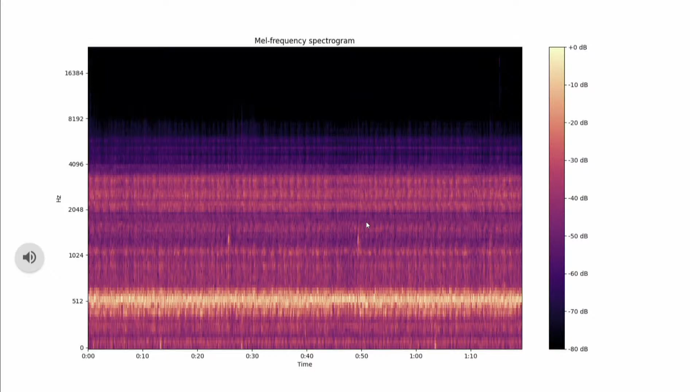Now, why am I interested in this? Well, first of all, my professional life has been surrounded by sounds of various kinds. I've been playing sounds as a musician, analyzing sounds, and particularly interested in looking at what we call the action-perception loop of people - how we, body and mind, interact in our activities. I'm also interested in the relationships between people and how they engage in musical collaborations, like dance and other things together. More recently, I've become very interested in how we also interact with the environment around us, including people, but also spaces like the one we're in right now.

So this has kind of been an inspiration here. You can say that, as a timeline, I spent the first part of my career studying more large-scale body motion and making instruments, and this is summarized in a book called Sound Actions that came out a couple of years ago. It's available open access if you're interested in having a read.

After doing this large-scale motion work for some time, I got interested in standstill and not moving, and what happens there, and how sound and music influences that. I'm currently writing a book called Still Standing about all of these experiences.

As part of that, I got interested in spaces of various kinds. In 2023, I decided to stand still every single day to work on this book manuscript - standing still for 10 minutes every day, measuring myself with a mobile phone and also recording the spaces with a GoPro camera and an ambisonics microphone.

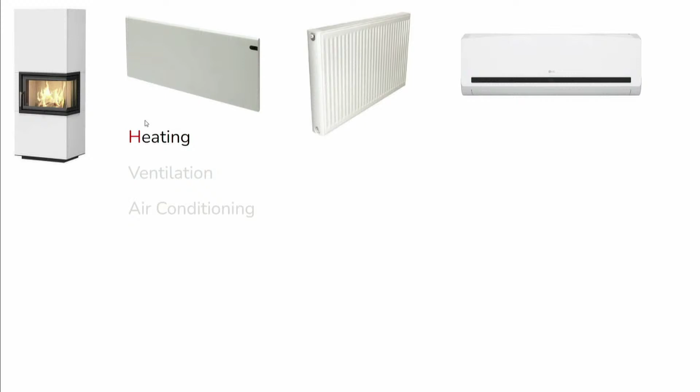So in most of our systems, at least as far as I understand, the heating is not really part of the system itself. That's a separate thing we're doing.

But the ventilation is there, and air conditioning, given this country, we don't really have that much of, just because it's not really that warm in general. So most often we have ventilation systems of various kinds that are more for blowing in air.

But then, what's the role of these then? Well, that's what I want to figure out, and that's why I have you here today as a group of people to help me figure these things out.

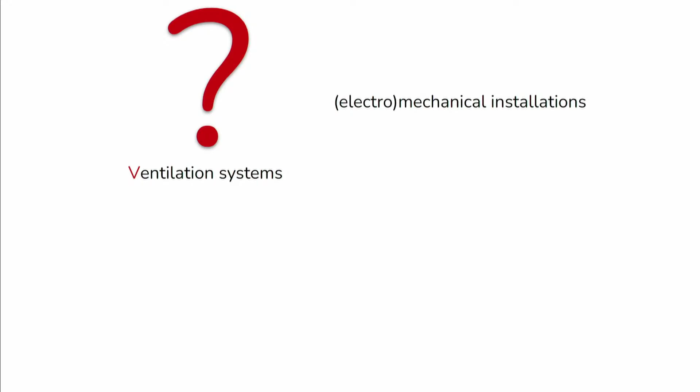Because first of all, ventilation systems are electromechanical or mechanical installations that we have in our buildings. They are important for giving us oxygen of various kinds. It's almost more metaphorical, but it's an interesting way of connecting indoor to outdoor, or outdoor to indoor.

For example, at home I have a passive system, it's just a channel, but I can hear the birds through that channel, so it's an interesting kind of opening to the world in a way, from inside.

You could also think about it more metaphorically about connecting people. I'm not exactly sure how the ventilation tubes run, but at least in my old office down in the Department of Musicology, it was somehow connected to one of the rehearsal rooms in the basement of the building where we had drummers playing drums.

And then that went straight into my office, four floors above. So that's also a way of connecting people.

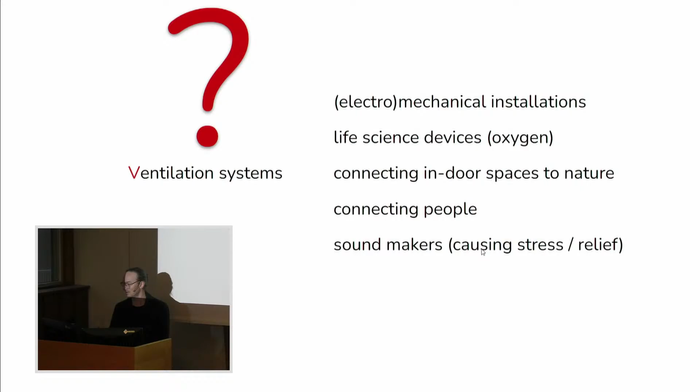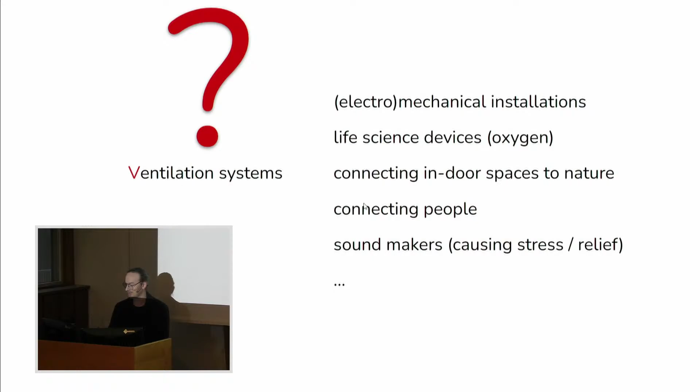And then, of course, you can think of it as causing stress or relief depending on the quality of these things, and possibly many more. So these are some of the interesting things I find about ventilation systems, and it's kind of inspired this workshop we have here today, to try to figure out what is this and what can we do with it.

Now, many people have asked me what type of method I use and we use when we explore these things, and I'll briefly explain that, to frame this workshop as well.

I like to think that we work both on the nature and the culture side, trying to figure out what's happening here, and I'm not thinking about this as two categories but more as a continuum. And I like another continuum as well between art and science, where we can think about different types of artistic and scientific practices and how they can coexist and work together.

So on the scientific side, we write publications, and on the artistic side, we create artworks. But then, of course, there are other things where we can use scientific methods to create art and use artistic methods to create science.

But also then different types of things in between, where we really see quite a lot of overlap. And that has highly inspired the work we're doing in general, but also this particular workshop.

And that's also why in this program you see a combination of more scientific and more artistic things, because I really want to bring you together and talk, so that we can talk to each other and try to see what's really going on here.

So with that, I think I'll stop the introduction and leave the floor to the first speaker, Anders Homb from SINTEF, talking about, well, just giving an introduction to ventilation systems, what it is.

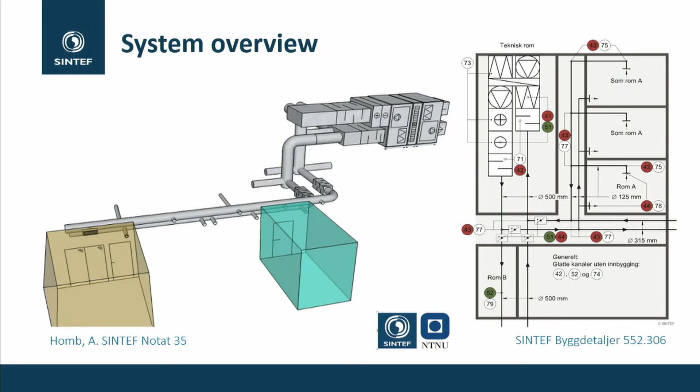Noise sources, important, of course. We have these mechanical units, fan and blowers. But another important contributor is the airflow generated noise. If airflow goes through a duct system, you get some airflow generated noise from silencers and pipes, bends and branches, dampers, and the terminal units. And of course, flow constrictions are very important. It may give a very sharp increase of the sound power level, orifices and perforates.

The third part is about sound radiation directly from the aggregate. I don't talk about that because that's normally far away from the rooms. Sometimes the duct wall can be a limitation.

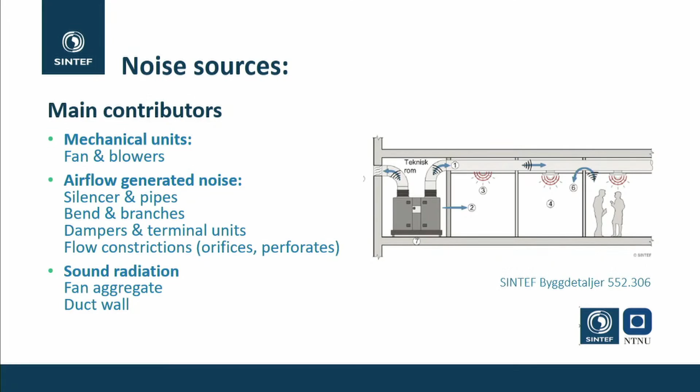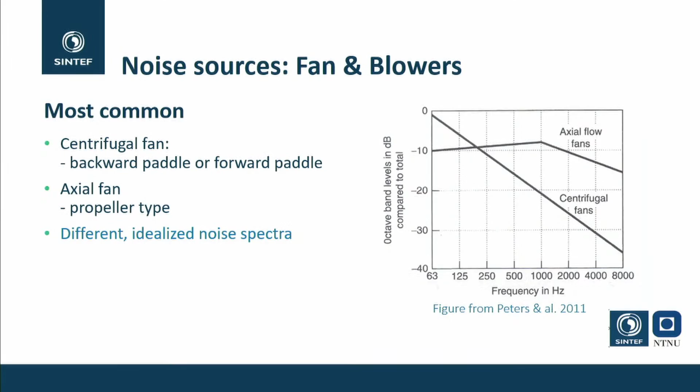For prediction, we need to have a reliable level of the sound power from the fan. We really need data from the producers, the specific fan power level. It needs to be adjusted depending on the volume flow of air, pressure loss, and other parts, but we still need this specific power level.

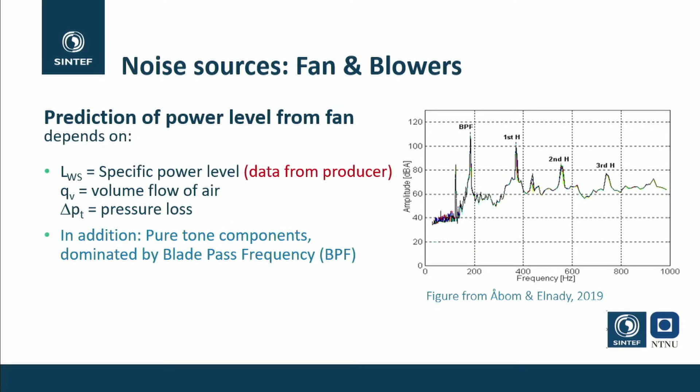So we have pure tone components, more or less. Then there's the airflow-generated noise. Prediction methods exist for this.

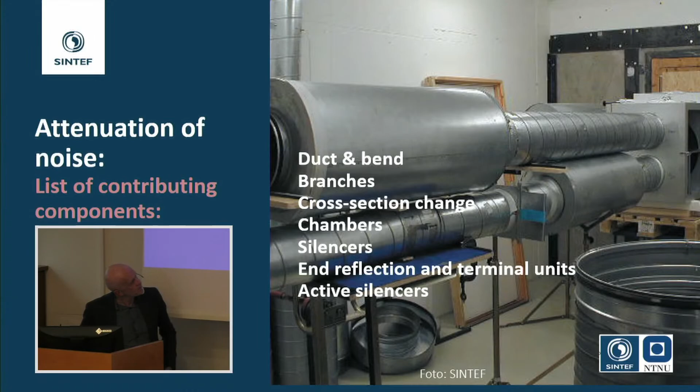Yeah, sound attenuation—no equations for me, just talk about it. Duct and bend: it depends on the type of duct profile, whether it's circular or rectangular cross-section.

The circular shape is dominant and most preferable because it is much stiffer, so it doesn't radiate the same sound—you need to take care of sound radiating directly from the duct. But when you need large cross-sections, rectangular ducts are often used to save space, since that format works better than circular. I think the circular one is also much cheaper to install and produce.

You will find tabulated numbers for what the attenuation level will be, with and without absorbing materials inside the duct. Next, the branches.

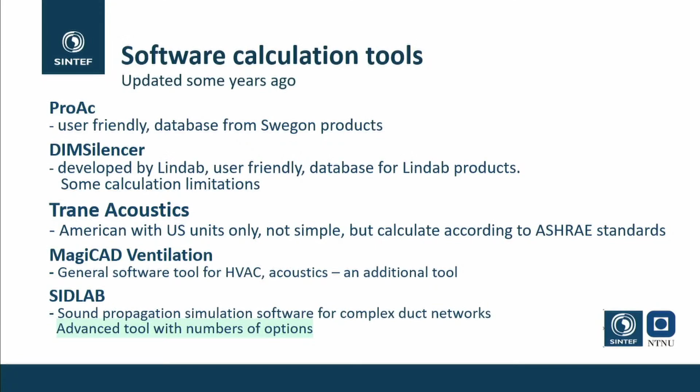But we also have a DIN standard similar to that. This SIDLab though is mainly developed for industry - car exhaust systems with much higher speed of air and maybe also higher temperature. So I haven't seen it used by engineers in buildings so far, at least not in Norway.

Summary on predictions: there are significant uncertainties in the total picture. At least plus minus 3 dB is to be expected compared to what you can measure afterwards. It depends both on the uncertainties in noise generation and attenuation components, and also on the measurement methods - because you need input data on a lot of products, how precisely they're measured, how that compares to the standards, and how the standard compares to what you have in your system. So you can't expect too high precision on these predictions.

But to get a bit closer to what you should get in the real building, you should still try to do some predictions, especially because you need to meet energy optimization requirements - at least in Norway, I don't know if it's the same in other countries. So results are often debated when comparing with measurements in buildings.

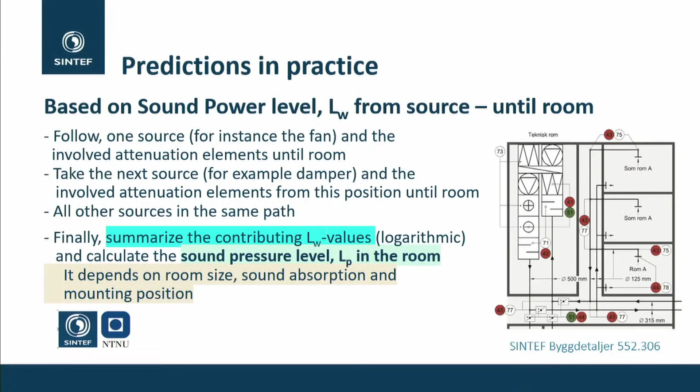So in building acoustics we normally measure in 1/3 octave band. The requirement is often in octave band. But if we need to study and get rid of frequency components, pure tones and so on, we need narrow band information.

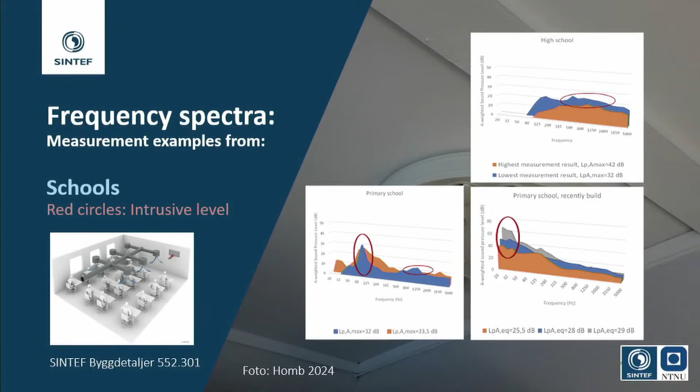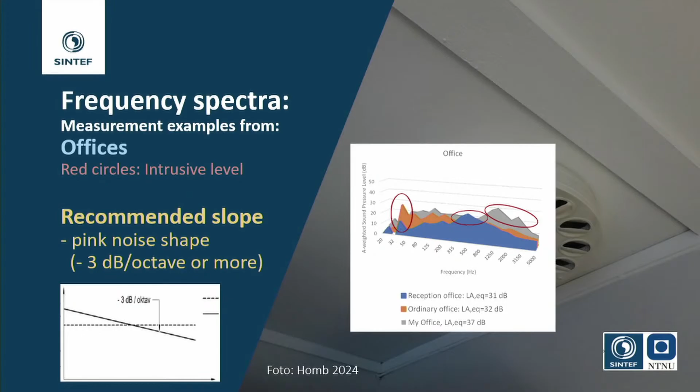Yes, then to the specific fan power.

If you actually need an energy efficient system, it requires low speed of air and as small airflow volume as possible. Then, of course, with a low speed, you reduce the airflow generated noise. That's pretty nice. But it means you need very often very large duct cross-section to have this lower speed, because you need to divide it on more space. And the negative part is you have to increase very often the story height. And story height costs money.

You can imagine that instead of having a huge circular duct, you can divide it into two or three smaller ones, and you save space. But then the cost of the installation will increase very much. So I haven't actually seen it, but it's an opportunity. The second part is you need low pressure drop in the system for saving energy from the fan. You can reduce the pressure drop by minimizing the use of dampers, silencers and in-duct absorbers, because they are important contributors to this increased pressure drop. But if you remove too many silencers or attenuating components, you get increased noise. So we have really a conflicting issue between SFP, space, and partly noise. SFP and noise directly are more or less in parallel, but with respect to space and noise, and space and SFP, it's conflicting.

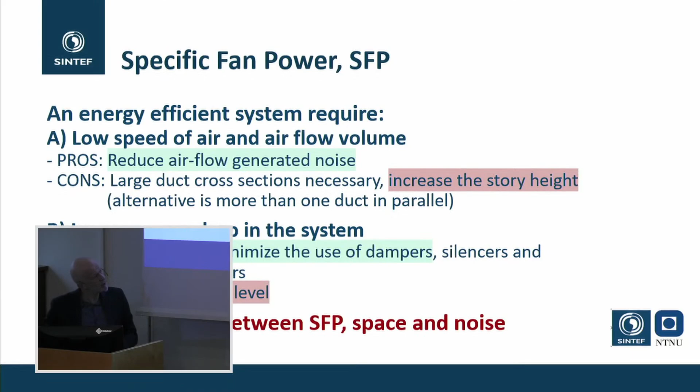We have seen, for instance, numbers of schools where you need duct dimensions like this one, and the story height becomes very, very costly to increase that space.

Alternative concepts: instead of having ducts into the terminal units, the volume above this ceiling is a big chamber, and you have only slits in the ceiling absorber to the inlet of the air. Maybe you can make more pretty solutions. This is actually from a recently built research building in Trondheim, called ZEB Lab, where we have experimented with different types of installing HVAC systems, and compared with the indoor climate and the responses from the people who have their office there. We will not focus on noise, but it's very interesting, and it's an alternative.

And then you also, of course, save duct length, you have much less meters of ducts because you use this chamber instead in this bigger room. It's not relevant for a small room itself, actually, more for bigger areas.

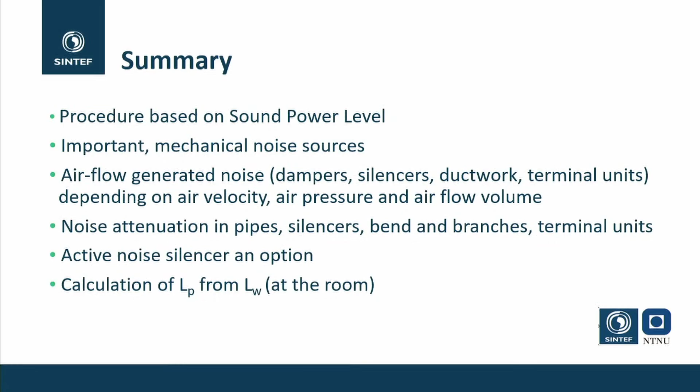So, already at the summary: I introduced this important parameter, the sound power level, which is the main thing to focus on inside the system. And I've told you about important noise sources, mechanical sources. And this very essential part is airflow generated noise from different components. The same components may generate noise, but they may also attenuate noise. Active noise silencer is an option, and when you then come to the room, you need to calculate the sound pressure level from the power level. Finally, you have actually a conflicting interest between the SFP, the space, and noise.

Frequency spectra: at low frequencies, noise from mechanical components dominates the content of the noise. At medium and high frequencies, it's mainly because of airflow generated noise. There may be some harmonics depending on the RPM of the fan, but mainly it's airflow generated. So I think you should remember it's very important to avoid pure tone components. They are really disturbing, or high sound levels in narrow bands. Fluctuating sound pressure is also very intrusive. If you happen on something like this, you can listen and recognize it very well. And the same if the pitch is slow or fast changing of the frequency components - it's also very disturbing.

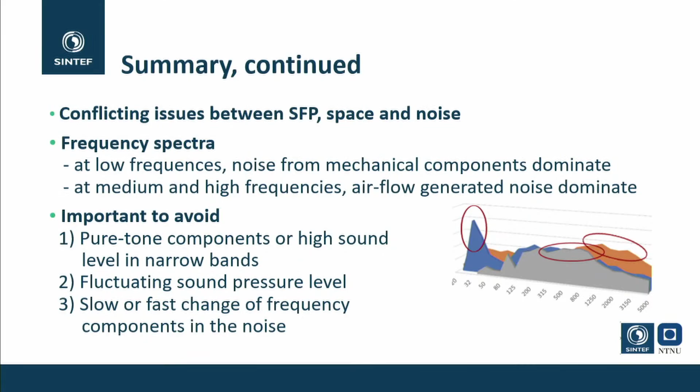Now we're going to something totally different again. I'm very happy to have Stig-Ronny Fredrikstuen from Glava here today, a well-known Norwegian company making insulation. I'm very much looking forward to hearing you talk about the material side of things. So over to you.

Thank you so much for inviting me here. It's very exciting, and as Alexander says, it's a bit different for us. I'm looking forward to seeing your reactions, and to tell you how we perceive these issues with HVAC systems.

For us, the sounds coming from ventilation systems, we perceive all this as noise, and we don't want this sound. So what we help with is to remove it. We will not work to adapt things so that you'll enjoy the sounds. For us, it's noise, so what we do is try to remove it.

I've made this presentation together with my close friend and colleague Halvor Berg, who is a concept developer for Glava. So you might see that he is also very interested in sounds, both in buildings and from ventilation systems.

First of all, Glava is part of Saint-Gobain, a very large international company making building materials. Glava has been producing insulation products in Norway since 1935, and today we are approximately 350 employees. Glass wool insulation products made from recycled glass is our core business, but we help with many needs for insulation products for buildings besides just glass wool insulation.

I've been in the construction business since 1998, so it's beginning to be a while. I've been working with technical insulation, and only technical insulation, in Glava since 2016 — actually it was 8 years yesterday, so it's been a while. I'm part of a team of 8 dedicated colleagues who only work with technical insulation.

For you, I'm also a hobby musician. I play guitar and I sing. I'm the world's most basic guitar player, and if you let me jam with you in the key of E, I will play the hell out of the pentatonic scale.

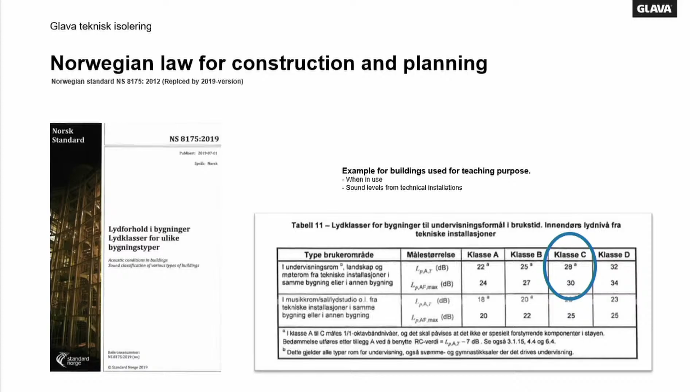In buildings for teaching purposes, we can see that there are two levels of decibels. The top level here, 28 decibels, is the maximum allowed average, and the 30 decibels is the maximum peak, as I understand this. So I will use this 28 decibels as an example through this presentation.

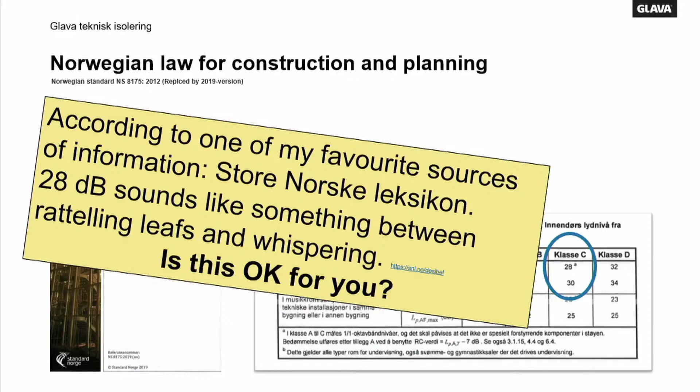According to one of my favorite sources, Store Norske Leksikon encyclopedia, 28 decibels sounds like something between rattling leaves and whispering. And our question is: is this okay for you? Are you happy with a ventilation system that sounds like something between rattling leaves and whispering?

Because when you are doing a project, if you are the building owner or you represent the building owner, if you don't tell the people who are building or making the contract with you what you want, they will, of course, make you the system that meets the minimum requirements. If you don't tell them that you want anything else than rattling leaves and whispering in your ventilation system, that's what you get. And of course, if you haven't specified anything else, you have to be happy with what you bought.

So I've made this to try to explain. Sometimes you use a main contractor who will be responsible for meeting your requirements, and the main contractor is then responsible for the subcontractors, gathering all this for you as a package, and you pay only the main contractor. So in this case, you have to tell the main contractor if you want something else than the rattling leaves and whispering - that I want something better, or if I'm concerned about sound, please follow maybe column B or A in the same standard. I think it's a good idea to use a standard, because then you can measure the performance later, and there's a system for that.

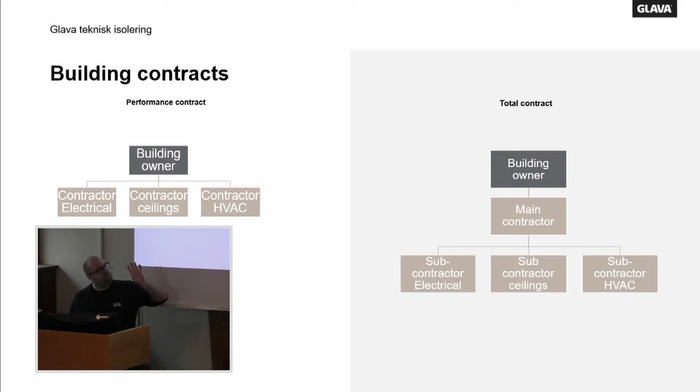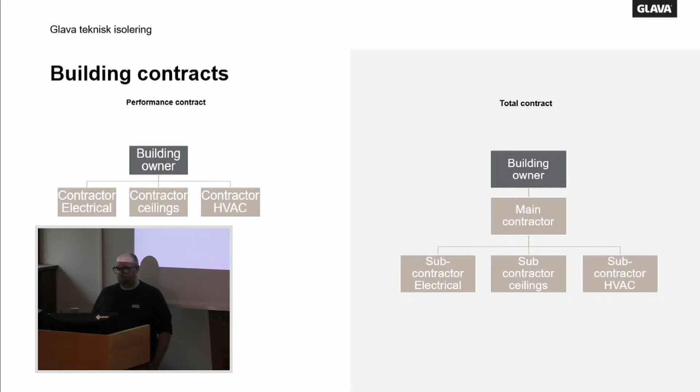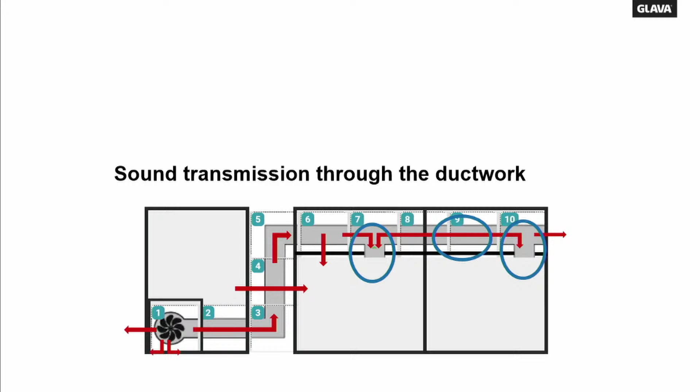So I will try to break this down and talk a bit about some of the different issues we see here. The first is transmission through the ductwork. This is the sound inside the duct. It can be made by flowing air - the higher the speed, the more volume or decibels you will have. And a way to stop this sound is by using silencers.

We provide a board made of glass wool with a glass wool tissue that air can flow across, and this board will absorb sound in the same way as a sound absorber on walls. This silencer works the same way: inside these duct pieces, these boxes, there is absorbing material where the air passes through, and it will absorb the sound.

For higher frequencies, we can use smaller silencers, which are placed out in the building. The larger ones, which have more or thicker insulation, are able to absorb lower frequencies and will typically be placed closer to the machine or the fans. The thicker the insulation, the lower the frequencies you're able to absorb.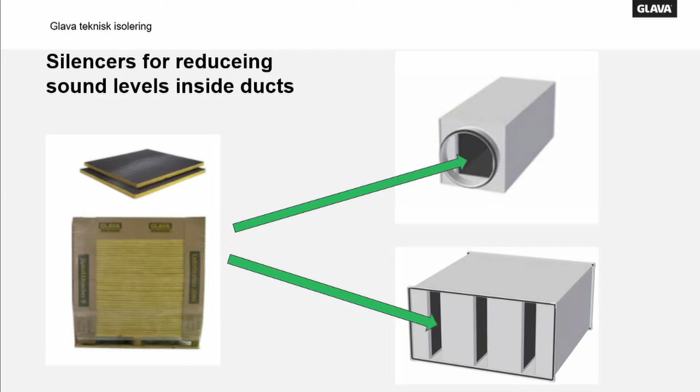It works like this: the sound waves flow through the duct, and when they hit the absorbing material, they are absorbed, and the volume coming out on the other end will be less than when it came in.

We had a filmmaker here earlier. I've made a film for myself, it's very high quality, and I hope we will get the plot here. It's quite advanced, we've been using two phones, one for filming and one for sound. This is my hand, and I will put my phone inside this and just hear how effective these silencers are, because there are many manufacturers and such, but just listen. I think you will understand this movie.

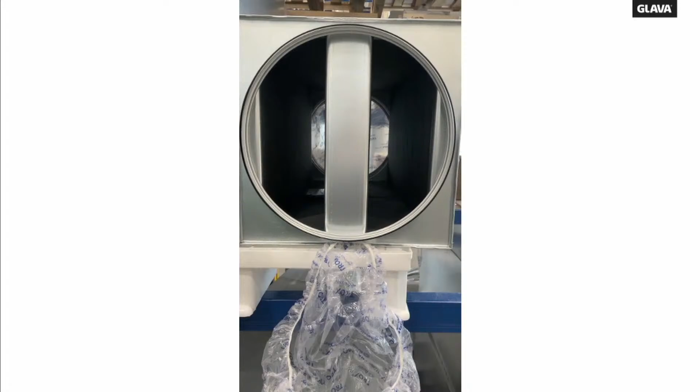So, how did I do, filmmaker? Good soundtrack.

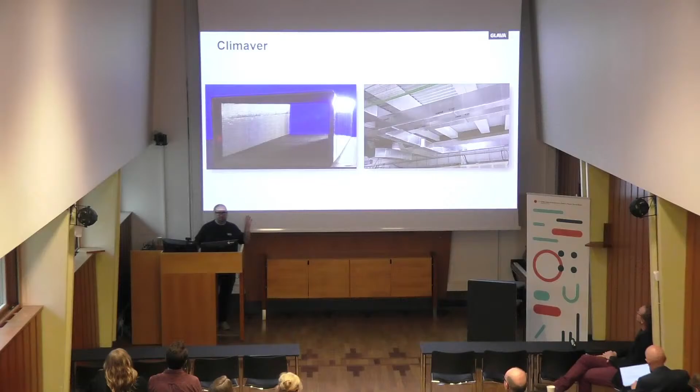This is a bit of a commercial, but in Glava we have a system called Climaver. I have a small piece of this duct here, but we are able to build the entire duct system with recycled glass wool boards that will absorb sound along the entire length of the duct. Every piece of the building will be able to absorb sound, and we can calculate the specific fan power and such, and the dimensions of the duct. As you can imagine, this will absorb a lot of sound, and we will also be able to avoid resonance from the material, because it's not metallic, so it won't vibrate. I will come back to that.

If we've dealt with the sound inside the duct, maybe we want to stop sound too. Absorbing is one thing, stopping is another. So the sound coming through the walls or through ceilings follows a different principle.

To stop the sound, the principle is that we would like to use gypsum. It's a heavy, hard, dead material that stops the sound from penetrating. We also want a gap between the two sides of the wall to avoid any resonance going from one side to another, and we want to fill any gap with mineral wool to avoid cavity resonance. So this is the principle.

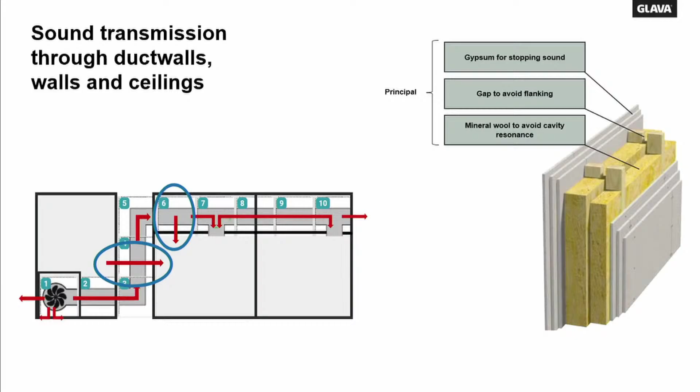Of course, you can insulate the duct on the outside, it will help to some extent. You can use advanced ceilings that will also help to stop the sound. But the principle is that we want to stop the sound, avoid vibrations, and avoid resonance. There are many ways to attack this, because there are so many different places where ducts are placed. But this is the principle for stopping sound.

This is a small section of this presentation, but I think sometimes when we specify and engineer the systems, this can also be a problem: having several noise sources will increase the noise levels. Doubling the noise sources will increase the noise, the dB levels, by 3 decibels. So if you meet the requirements with 28 decibels, you're good to go.

But maybe you or someone else also add more technical equipment with the same decibel levels. They also meet the requirements from the law, but the result is not 28 anymore, it's in this case 31. This can maybe be ventilation.

Maybe the other one is plumbing, maybe it's more ventilation, different systems. It can be something to be aware of for those calculating and making the systems, that more sources will increase the levels, even though one system will uphold the law or meet the requirements. It can sometimes be hard to find the responsible one for the customer not being happy, because what the customer experiences is that the noise level is too high, but it's not the ventilation's fault and it's not the plumbing's fault. It's just an unhappy customer. I don't know how big this problem is, but it's still a truth.

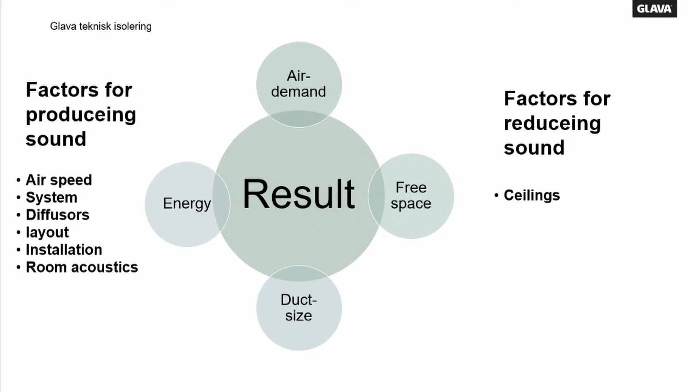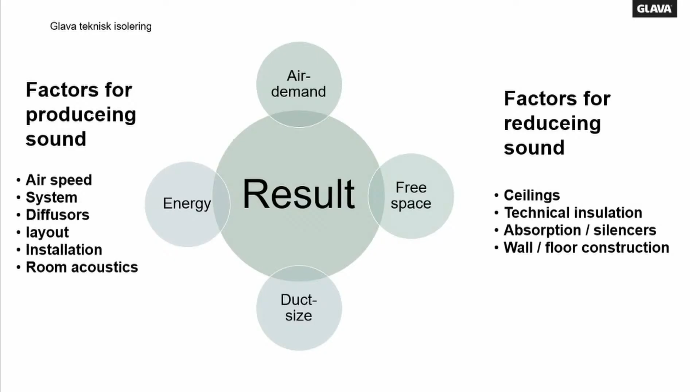We can reduce some of the perceived sound with ceilings, sound absorbing ceilings, and also stop the sound from the ducts penetrating the ceiling. We can use technical insulation around the ducts to prevent sound from leaking, and there are different materials we can use there, but we can insulate the ducts on the outside. We can use silencers and absorb the sound inside the ducts and also in the rooms with the room acoustics. And the construction of the building - is it resonating a lot, or is it built in a way that maybe stops some resonance? Are the sound stopping walls good or bad? It will also affect how the noise travels through the buildings.

So that was my presentation. Thank you so much for listening, and I hope you learned something.

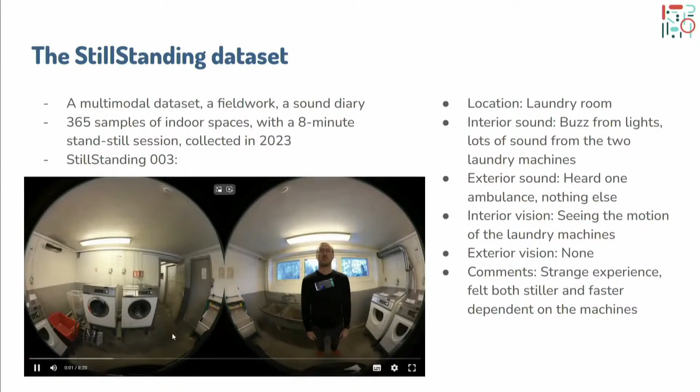We plan to do a release of all this data we've collected on OSF so that everyone can use it for their own purposes. You could use it for analysis, for training machine learning models, or for artistic purposes.

Now over to some basic statistics related to ventilation. This is extracted from the text descriptions collected every day. It's not objectively describing whether ventilation is present in the spaces, but more of a subjective reflection of whether the ventilation comes to mind, so when it's noticeable.

As a result, about half of the collections mentioned ventilation in the text description, and it's actually the largest indoor sound source. So yes, ventilation systems are very important.

There are also descriptions of whether the ventilation systems are quiet or loud, or whether no specific loudness is noticed. Out of the 187 samples where ventilation is mentioned as the indoor sound source, about 37% didn't specifically mention the loudness, but about 60% do mention it, and of those, about 38% are quiet and the rest are noisy. So loudness is an important aspect of ventilation systems.

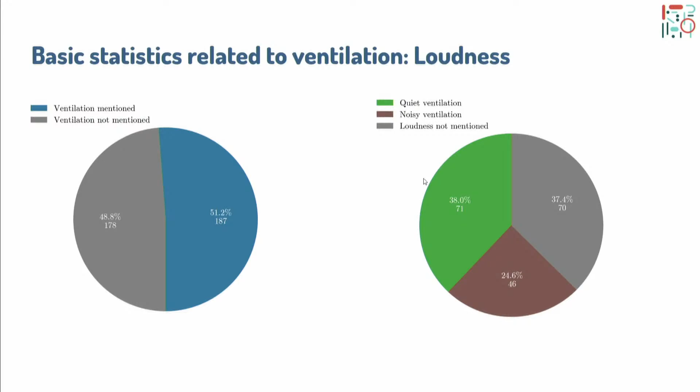Apart from loudness, Alexander also mentioned other characteristics of ventilation systems that are typically not often stated, for example directionality. In some rooms, the ventilation systems are omnidirectional, with sound coming from all directions. In other rooms, it's specifically clear that the sound is coming from a specific direction, and in some rooms there are even multiple sources of ventilation from different aspects. That's quite interesting and not very often mentioned.

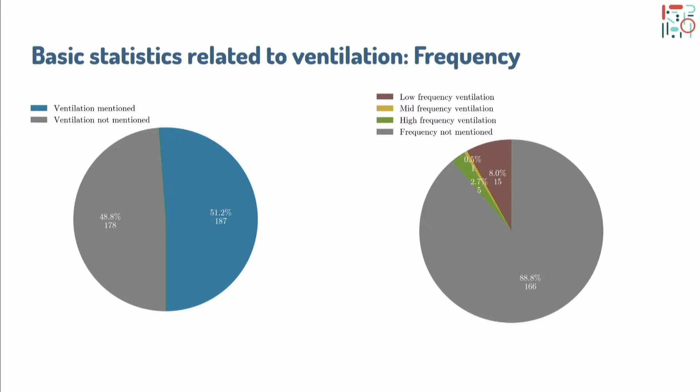Another aspect of ventilation is, of course, frequency. But a little surprisingly, it's not very often mentioned as a characteristic of the ventilation systems. Only about 12% of the samples mention frequency. Most of the time it's a very specific low frequency component, whereas mid or high frequency components are very rarely mentioned.

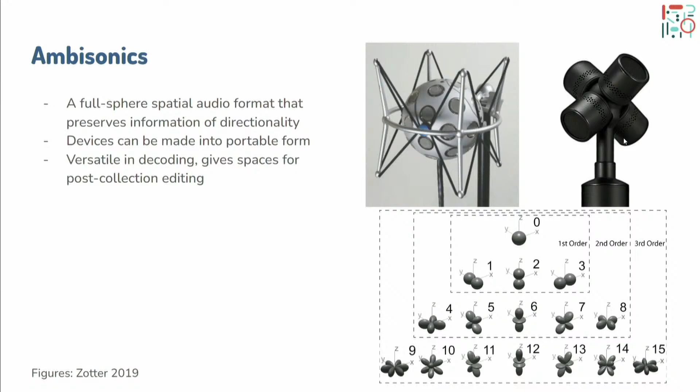Now over to ambisonics. We had some other guests in the workshop mention ambisonics as a very important tool to analyze the spatiality of soundscape. Natasha was mainly using higher order ambisonics, which is very precise in terms of directionality.

Here, for simplicity's sake, we used first order ambisonics. It's less accurate in terms of spatial location, but we can still reconstruct the spatiality of the soundscape from the recording, and decode the sound at a specific direction from the ambisonics recording. For example, if you want the sound right in front of me, we can put a virtual speaker at that direction and get the output as a mono audio source from that specific direction.

I just need to lower the volume because there's a very loud clapping in between. In the beginning of each recording, we recorded a clap for synchronization and also to analyze the room reverberance. It might be a little bit loud.

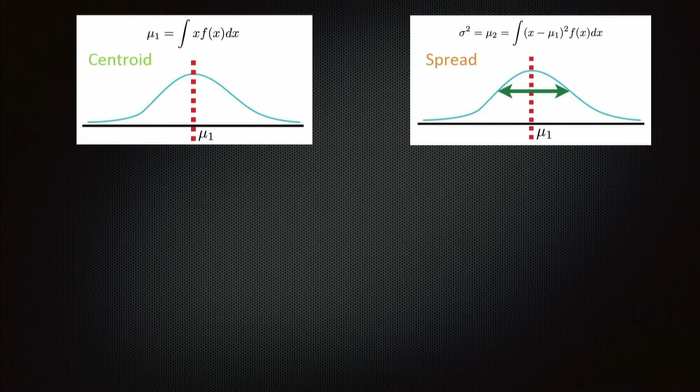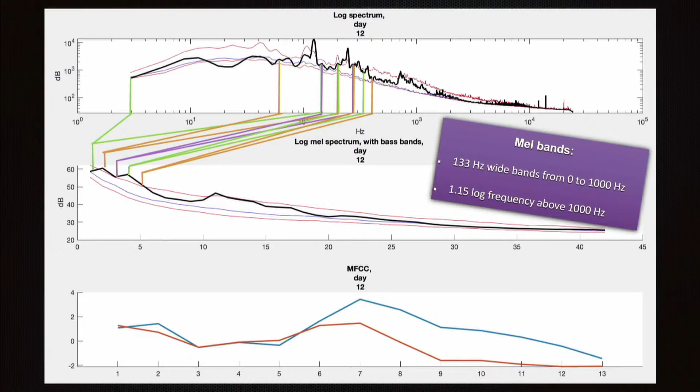For this description of the spectral shape, what has often been used is computation of the mel frequency cepstral coefficient, MFCC. Starting at the top, you have this spectral distribution, then we decompose each band. This morning we saw summation of the spectrum across octaves and thirds of octaves; here it's similar but with a higher frequency resolution using mel bands. We start with 133 hertz wide bands, for instance from 0 to 133, sum them and get this first value on the left. Then we do the same for successive 133 hertz bands, linear at the beginning and logarithmic for high frequency, giving this mel band spectrum shape. From this shape we make a compact characterization by computing the cepstral coefficients. It looks technical, but basically it's a kind of periodic analysis of that shape, giving this curve: a series of numbers that compactly describe the spectral shape.

Then we get back to this analysis of the spectral distribution and the spatial distribution with this ambisonic recording. As Arthur mentioned, if we start with just a mono channel from this ambisonic recording, you have this spectral distribution. Then the idea was to take the direction where there is a minimum of energy, assuming that will be where there is no extra sound, more like the ventilation itself. So we reconstruct that signal from that direction, and we get this.

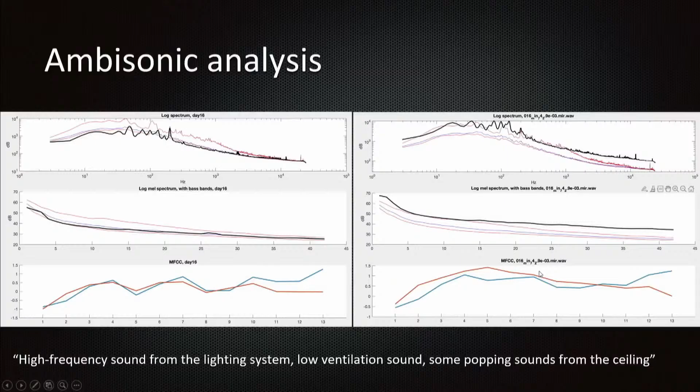So now we have the spectral shape related to that minimum direction, which could be the ventilation sound. We can then compare - that direction is shown in red - you have the sound, and you can compare with the other sound in the data set, and the same sound from the mono channel, shown somewhere here as number 16, and so on. It's just the first step, but the idea would be to decompose this sound and focus on the ventilation.

Then, a bit of a simplification here, but there is in this MIR toolbox a possibility of doing some kind of tonal analysis, key estimation, based on Krumhansl's research. There are some distinguished music cognition researchers here, so I don't want to oversimplify, but the idea is that we can try to do the same with the recording of the ventilation. You have the spectral distribution, which you can map as a distribution along the different pitch classes, and then compare it to this Krumhansl profile to get a kind of estimation of tonality and clarity of key.

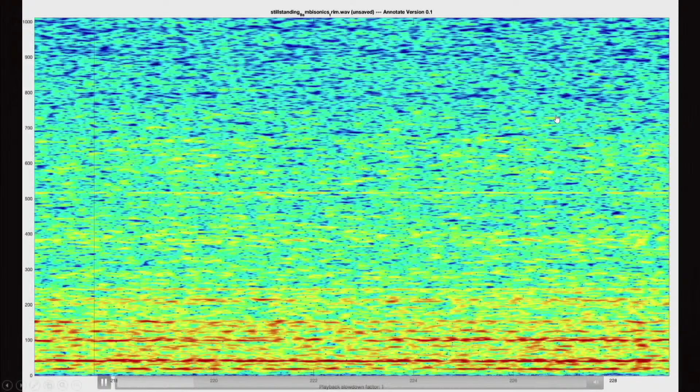But then it would be very interesting to look at the detail of temporal fluctuation along each frequency. The first possibility that is often used is to compute spectral flux, which means we compute the difference between successive frames, and you get a curve.

You have to remove the peaks that are due to some loud sound, but then when you look at the detail, here for instance, you have some kind of signal that indicates the fluctuation of that given signal. You can compare these fluctuations between different ventilation sounds. But the idea is that we need to be more subtle, and for instance track the pitch and see the fluctuation of the pitch and the periodicity.

I'll mention periodicity in the next slide. But here we could see some periodicity of the oscillation for each frequency. Some other possibility, maybe I have to finish quickly, but some kind of spectral structural analysis could also reveal this fluctuation. So you have the spectrogram for the whole sound recording, for each successive time frame, and you compare each time frame with each other time frame.

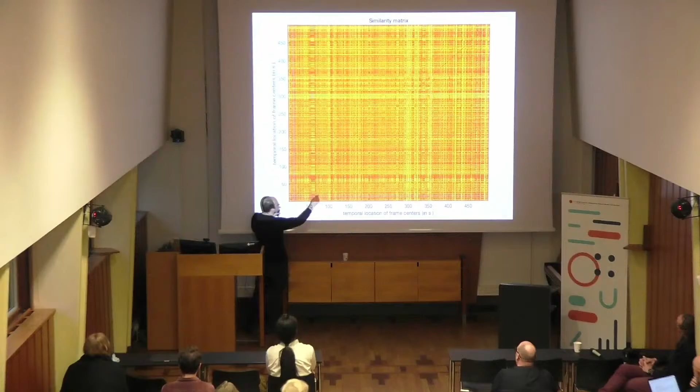This color red means that these two frames are very similar. So you start to see some kind of texture in the sound, some structure, some nice pattern, so that you can compare due to some kind of macro structure, some micro structure, and this spectral fluctuation.

This one is very nice. It turns out that it's from the yoga training room, so yes. And I have the sound, and if it works, it should work. And this is due to this rhythmic thing, due to some heating maybe, that appears at the beginning, middle, end - this rhythm.

So this is the last aspect I'd like to mention - rhythmic analysis, and we can get very into detail. Computing a periodicity of the dynamic of the signal, the onset curve for each successive time frame, and you have a periodicity. You can see, for instance, here you have a periodicity of 1 second - it's the same example. There was a tatum, so every second. But of course there is a tatum, so there is a faster periodicity, maybe 1/3 of a second.

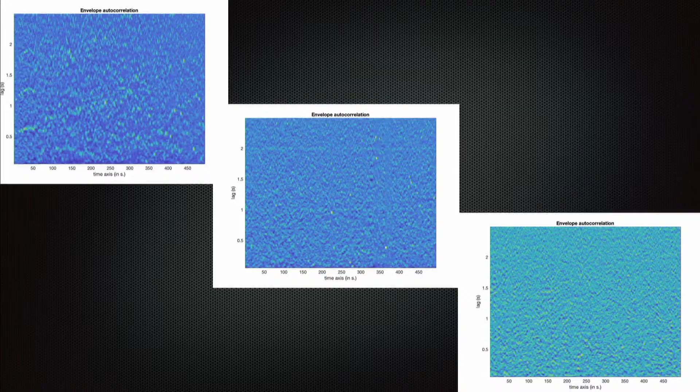And this can be displayed in this way. So you have this kind of possible rhythmic texture for different sounds. This one is interesting because there is some kind of change. And this was the example where I mentioned some popping sounds from the ceiling. It was just after some time, and these are the popping sounds that change the texture.

So a lot of things could be considered. It's just the start of some research here. But yes, you can see that it will be very interesting to go further into some kind of more advanced transcription of these sound objects and so on. Yeah, so that's the idea. Thank you.

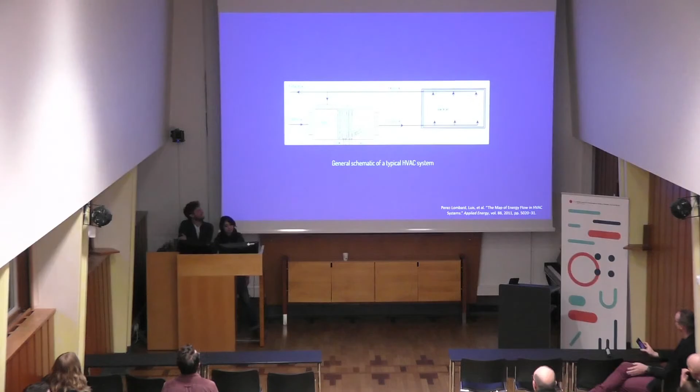Generally, a ventilation system works by pulling in outdoor air. It goes through a mixing box, through a heating or cooling coil, and then it is supplied into a room through supply vents.

That air is then absorbed into the return vents, and some of it is pushed back into outdoor areas, and some of it is returned into the mixing box. And I want to mention that here we have supply vents and return vents.

In return vents, the air is pulled out, so you have suction, and in supply vents, the air is thrown towards you.

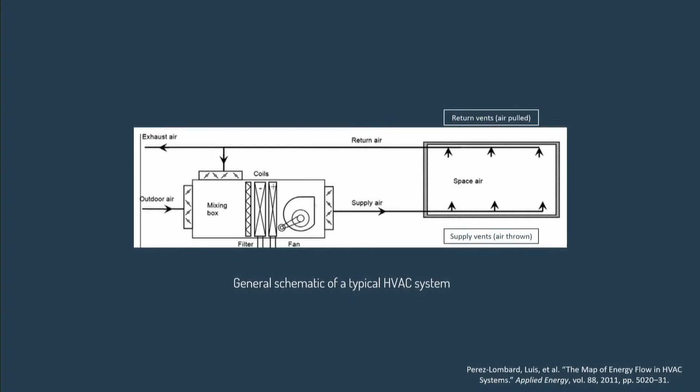The reasons for vent interventions are either noise reduction or aesthetic improvements. Yeah, at least I definitely got into this for reducing sound.

I'm mainly from a guitar background, and I've recorded guitar for most of my life. Guitar is a very quiet instrument, so you constantly fight your secondary ensemble partner, which is always some sort of ventilation, weird crackling rhythm thing.

Also, in apartment buildings, having a home studio is tricky, and we're not allowed to tinker with fans. So one of the easiest ways around that is to augment the vent exhaust in one room and create sound mazes - I'll get back to that a bit later.

It works surprisingly well because we're not allowed to tinker with airflow, but this way airflow goes through while sound doesn't, so it's a very good improvement overall. We'll get back more to that, and we can also redirect things with ducts and so on.

Although ducts are waveguides, so they become like little instruments that shoot all the sound in one direction as well, and there are ways of going around that too.

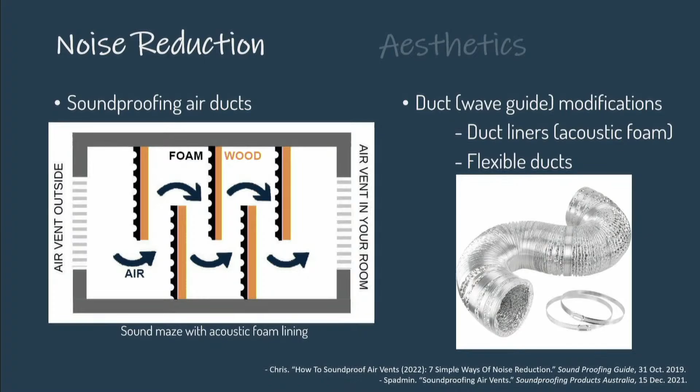For aesthetic improvements, people use vent covers, which are magnetic strips you can simply stick onto the vents. People also experiment with wallpaper, cutting out little strips and putting them on the vent.

And some more creative people go for smart interior design. But Ioannis has strong feelings about this - very strong feelings. This is soft hacking, if you can even call that hacking.

This is just a bit of paint. We can do better. Most importantly, it doesn't combine the two - it doesn't combine any noise reduction with aesthetics. So you'll still hear the same thing.

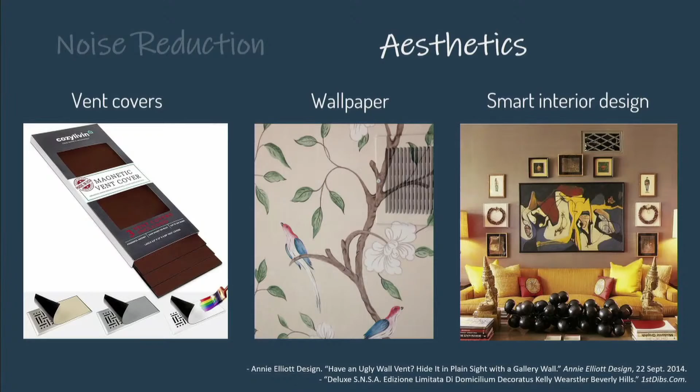So there's definitely hacking opportunities here. But we're kind of starting out - it's a question of what can we hack, and why doesn't everyone always hack with their ventilation system?

There are some real modification constraints, not just the physical, obvious accessibility constraints. We can't always reach up or open things and tinker with them.

And note that this picture doesn't necessarily reveal that we actually performed surgery on Alexander's office ceiling. I'm not saying we did or didn't. But there are some legal murky things, like what are you allowed to do?

And there's a sort of culture of not messing with vents somehow. Maybe there's this public-private boundary where there's personal space - you can put furniture in your office, but building structures are off limits.

These are mostly invisible systems - you wouldn't even notice there's all this up in the ceiling unless you hypothetically lifted some of the tiles. So there's a kind of trained cultural docility around ventilation and a feeling of powerlessness when it comes to mitigating it.

You just accept things as they are. I can sometimes barely get a power extension lead at my office, so good luck getting someone to fix my ventilation system.

It just gets accepted. Then the question comes up: who actually defines these things? Especially in terms of health and the indoor health implications of constant noise pollution.

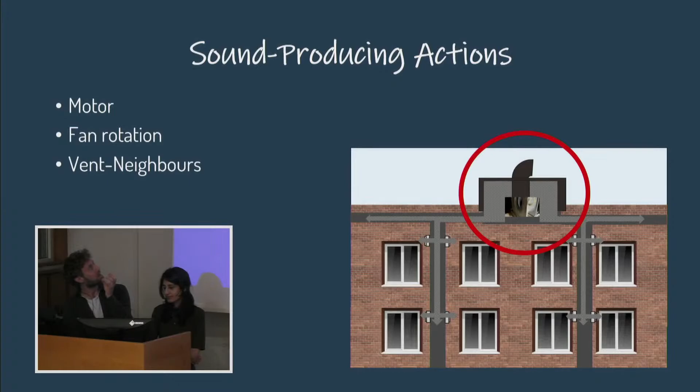Especially when it comes to home hacking, I want to also deal with the vent neighbor sounds as well, for all sorts of reasons.

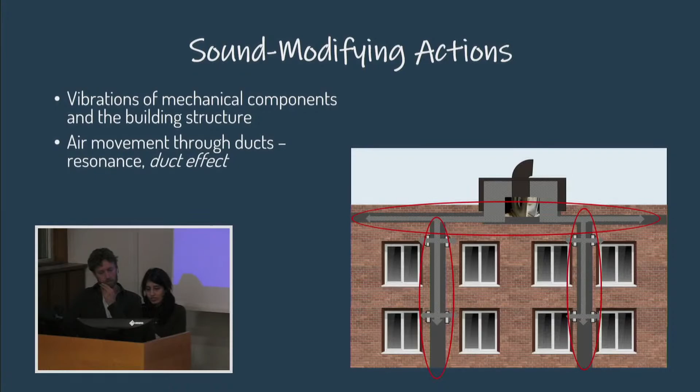For some sound-modifying actions: the vibrations of those mechanical components, when they interact with the structure of the building, modify sound. Additionally, air movement through the ducts creates resonance, called the duct effect, and air movement through the return vents, which pull air out of the room.

Then we'll get back more to absorbing sound and sound mazes. Ideally we could put a maze at the source, but we couldn't do that in most places, so we'll be doing that mostly through augmented vents that we'll show in a bit, and also playing with filters and stuff like that.

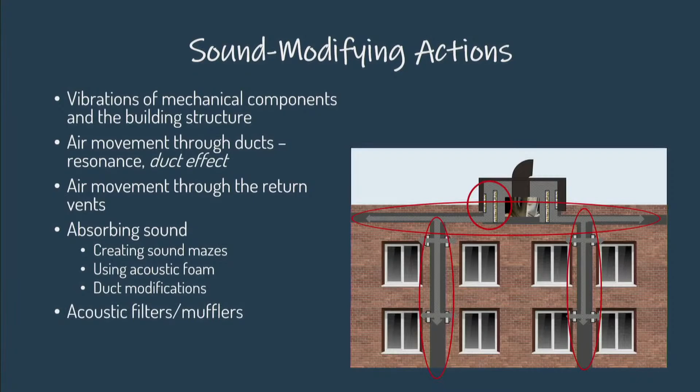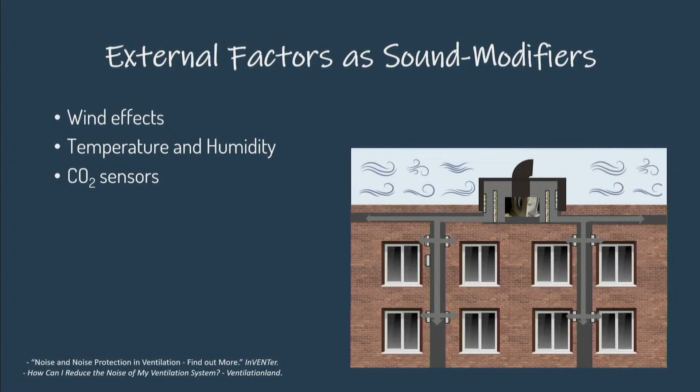Then we have temperature and humidity, which directly affect air density, and that also affects airflow. We also have carbon dioxide sensors, so when the air quality of the room drops, the fan speeds up to allow for more air intake, and that also contributes to the sound.

So when it comes to what we can do, again there's a blurry boundary between the structure and the interior. We ended up mostly doing interior hacking, at the exhaust bit or the intake bit. What's interesting is that we're using this idea of augmented vents, building out from the wall.

As that sort of sound-modifying action, what's interesting is that in Alexander's rooms, for example, you have two vents, two inputs and outputs, so you can play with both of them, and that changes the whole pipe turbulence going on in there.

We tried various things, like inserting mouthpieces into the vents and modifying it that way. But interestingly enough, just playing with that kind of turbulence was very interesting and made all sorts of cool sounds.

We did joke in the beginning that a lot of people like nature sounds, of course, so complete silence isn't great. So could we hack the vents to sound like a nice pouring river or songbirds tweeting and stuff like that?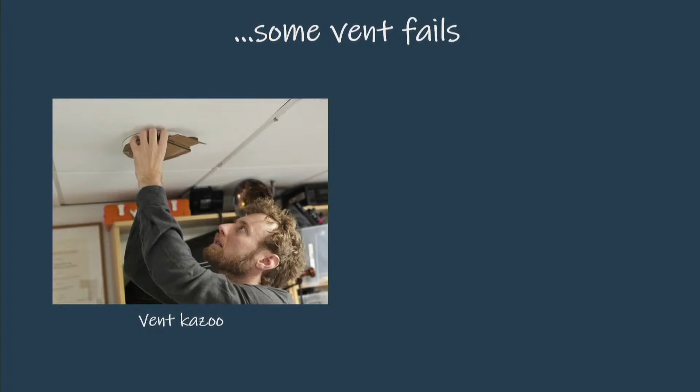Oops, sorry, that's okay, we've heard this. We also had some vent fails. I tried to make a vent kazoo. Almost worked, but it's still a prototype for now. It didn't sound like a kazoo, but it sounded like something.

For future experiments. Now for the home hacks - I got into this from hacking my own home.

That's not meant to be there. So in my flat, I'm at the top of the building. This picture is actually of my flat - that's me. I'm on the top floor, and there's lots of noise from this crazy fan at the top of the building that vibrates into the whole building and goes right out here - you can see my cursor - up there, there's a hole that goes straight in, so it's very noisy.

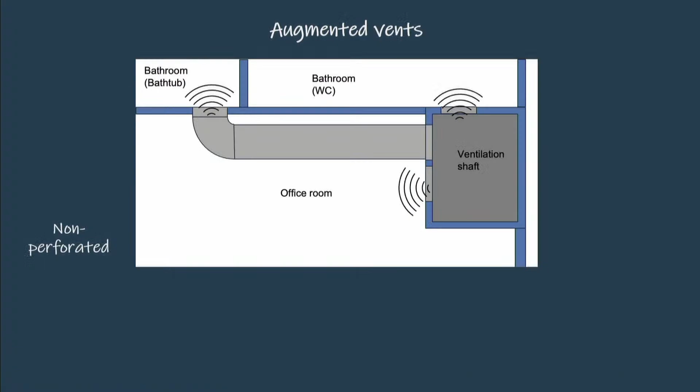This is a schematic of how it looks from above. You have this vent that connects you to all your vent neighbors, and a massive - I can't remember the decibel readings, but it was pretty high - and with these ducts, it just goes straight into all rooms without any hindrance. So I tried making a sound maze, like an augmented vent, because I'm not allowed to go in here and do things, by having ducts go through the maze, so that air goes through but sound doesn't.

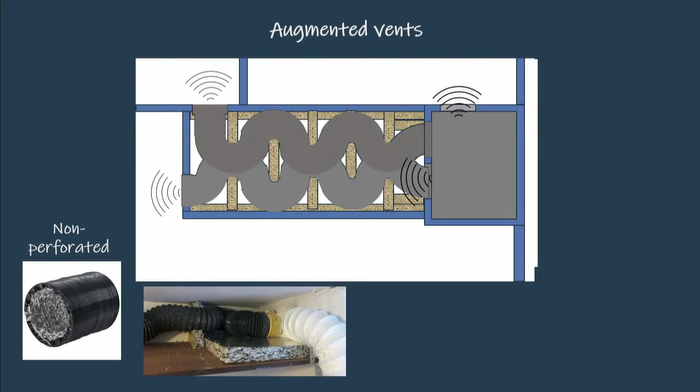However, the ducts I was using were perforated, as Stig explained one should not use. So the sound just went straight through, which didn't quite help. So I had to rebuild it all with slightly thinner materials, and then it worked a charm - it's just dead silent, really nice. Not the prettiest thing, but it was meant to be behind a wardrobe, so that was fine.

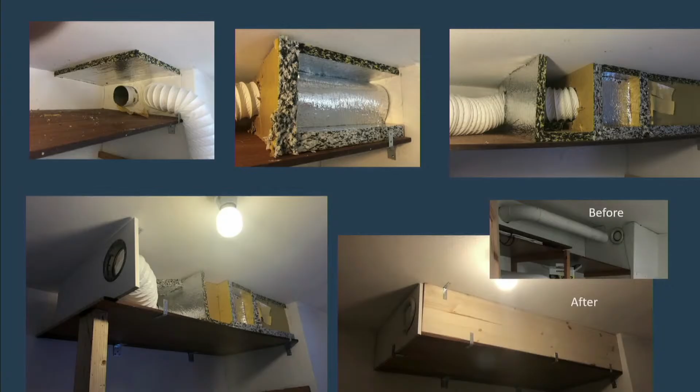I started thinking about combining all these things, because I also record at home, so I needed to build absorption panels and stuff, and of course still had my ventilation. I realized the closest thing we have to a fusion of this is those rotating lamp fans you have in warmer countries - we don't have them here - so surely one can combine them in some way.

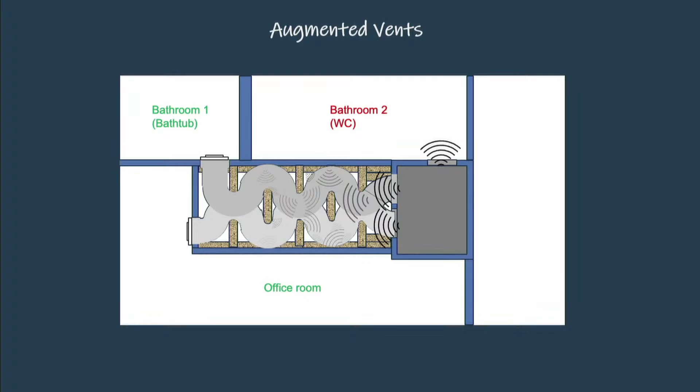If you remember, this sorted out these two rooms, but the second bathroom doesn't have it, it just went straight out, so there I had to properly build it out again. The question was how to combine it all, so I made a sort of dropped ceiling, and it looked really nice in the end - you get the sound maze, and a drop ceiling without actually dropping the ceiling, plus LEDs and stuff like that.

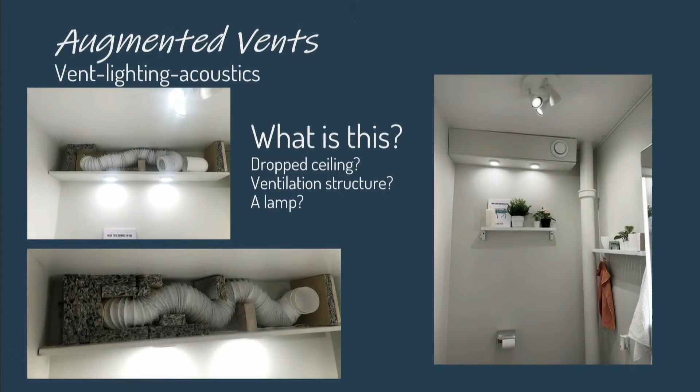An electrician told me that's a lamp - because it's not part of the structure, you just put it there, it's a lamp - so I didn't need an electrical certificate or whatever. The transformer is actually outside as well, so it's quite easy, you just put it up there and it's great.

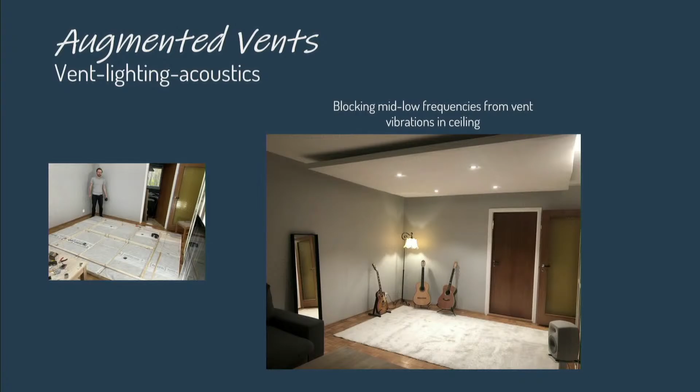We also did some more hacky hacks, starting with mechanical hacks. The idea was to use low-density objects because that would allow them to move more with the airflow, and we used textured surfaces. I 3D printed a ping pong ball - not a complete ping pong ball, a mesh ping pong ball to allow airflow inside - and I put some beads in it, some embroidery beads, and then just put it in the system.

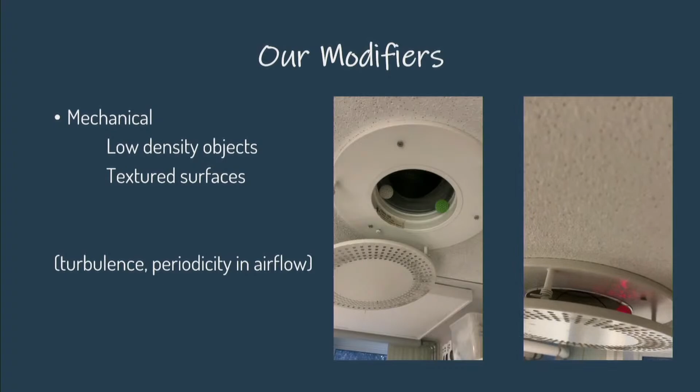So it's there, but it's just there. And then I decided to do something with lights, still using the principle of turbulence. So it's the same ball, but this time it has a light in it. So it's like the ventilation system is breathing. It has a life of its own.

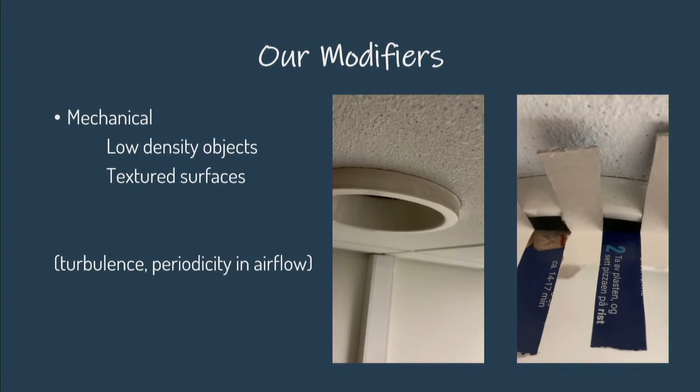And then some more stuff, just plain old cardboard, and a little filter. This cardboard was taken from a pizza box. Says cheddar.

And then I also experimented with positive and negative pressure, because we have the supply vents and the return vents. So I stuck a honeybee on a string and put it in the system. You see how it moves a bit here, but then I change the pressure, and then it moves a bit more.

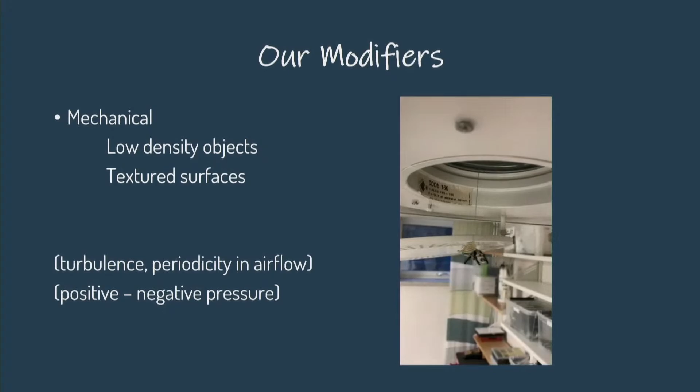And apart from that, we also experimented with some digital modifiers. So I used a light-dependent resistor. Imagine you're in a room and the lights go out and something happens, like there's a ghost in the room or whatever, and then this happens.

So I conveniently placed the speaker inside the duct, so it would enhance the reverb. And for those of you who can read Morse code, this was Morse for help, H-E-L-P.

Furthermore, we have not worked on this yet, but the idea is to continue our research, and we might sonify ventilation systems to make the airflow provide information about the time of day. For example, it might slow down at lunchtime, and that would be your cue to go and have lunch.

Or we could musicify it. For instance, on Friday night, you might get musical output.

Then we could also gamify it. For instance, when you open the door, you get a personalized greeting from the ventilation system. Or we could make it interactive, so it encourages you to get up and open the door, encouraging physical activity, and when you do that, the airflow changes again.